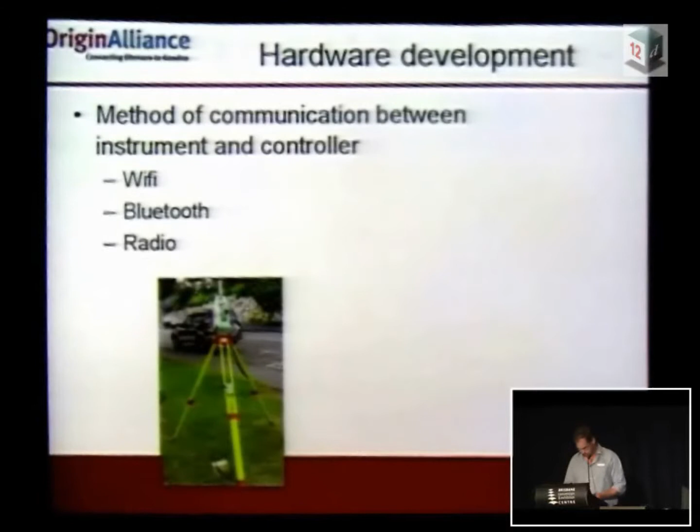So Paul was, Peter will just bring up a few photos there - Paul was very obliging and had developed a USB radio to talk to instruments, which has become one of the tools along with Wi-Fi and Bluetooth. But mainly on site these days we're using USB radios to talk to our instruments, and as you can see there, that was the first prototype from Paul: a grey radio, one end on a little tablet and another one on the legs.

So we headed in the right direction. We had some radios to talk, Mick's writing some software, it's coming along. We actually managed to prize a bit of a beta version out of Lee.

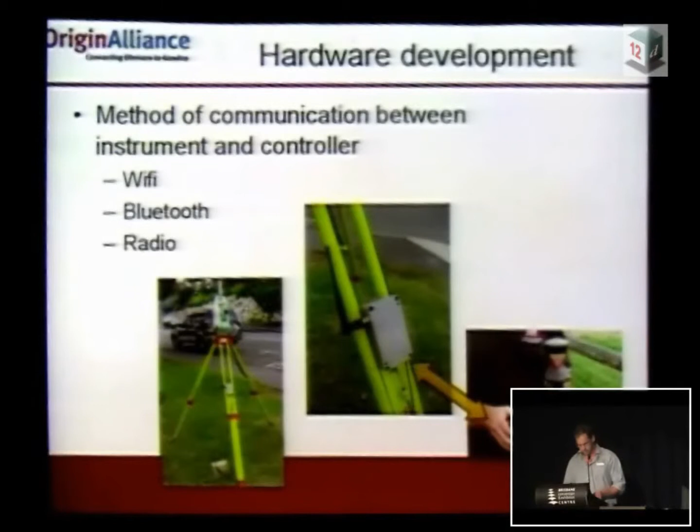The next problem was choice of PC platform on the other end. A few things had to be looked at there: battery life, touchscreen, keypad - a few questions about the possibilities. Pete searched the world over actually, tried lots of different stuff, all of which I had to find funding for, mind you. And these days we've settled on a fairly good platform, and I'm running 15 crews out there on that platform.

Next slide here that Pete's going to go to, and he had to zoom in. Some rigorous testing was completed by his 2-year-old daughter on these touch screens, just to make sure they were easy to use for surveyors. Apparently they passed. Thanks, Georgia.

So where we are now, we've got a very handy little USB radio developed by PDS. The first one you see there is silver, which was the first one that went to production, and in more recent times the yellow one, about the size of a cigarette packet, is the latest and greatest. It fits quite comfortably behind, hooks into any USB port on any computer, ruggedised tablet, anything you like. It only comes in yellow, but apparently, don't know why.

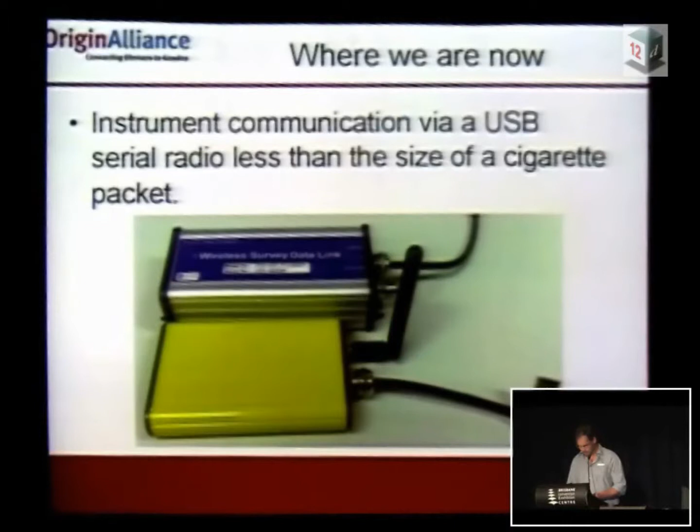Platforms - personally, we've settled on the Panasonic. It's just come out with a 300 nit transflective screen, and it's quite good. I'm sure it's going to be a big leap forward for the guys on site at the moment. We'll be using that one.

Further compatibility - compatibility to instruments, compatibility to GPS receivers. A few of those are on site, and Graham's spoken a fair bit about that.

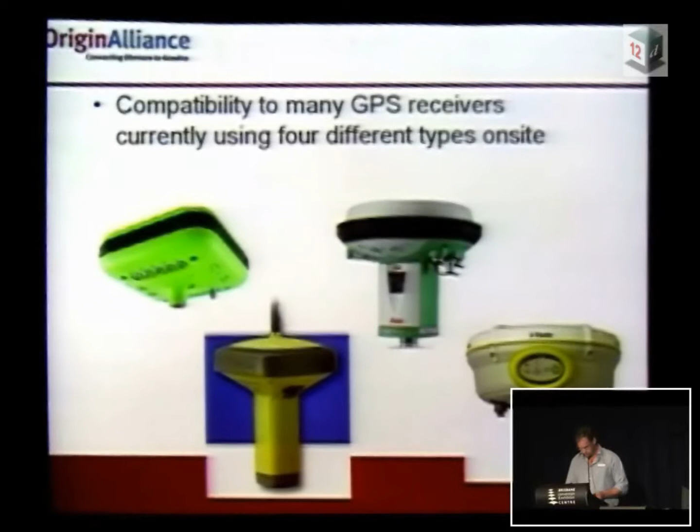More powerful, lighter hardware platforms - as you can see, in the last 2 years a lot of new stuff's come to market, and a lot more will come to market. One thing I think we will see for surveyors is a single desktop computer for site work, one computer that does everything. The platforms are getting powerful enough now that we'll be running everything off one platform, with really no need to run a second desktop computer.

And an even greater selection of survey instruments out there - that's going to grow and move on. So there we are, we've developed a very usable platform software for 12D field.

I can tell you it only just came in time for the Origin Alliance, and I really don't know where we'd be today without 12D field, because the revisions of models that get thrown at us - the TTM designs - we're up to revision 7 and 8, and I think last count was 13 or 14 TTMs, changing weekly, fortnightly. So developing files for third-party software would be a bit of a nightmare.

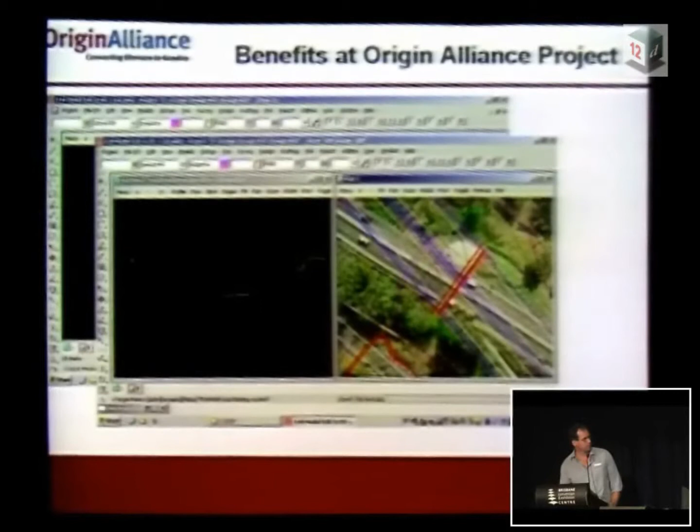I think we had a couple of screenshots of the type of thing - a fairly complex design there, 6 Mile Creek. These all run very smoothly on that little CF-U1 without a problem. You can actually run a raster in the background if we like, as we're out there. And we can even take a 3D bridge design out there as an example - one of the smaller bridges - and have a real good look at headstocks and abutments and different strings.

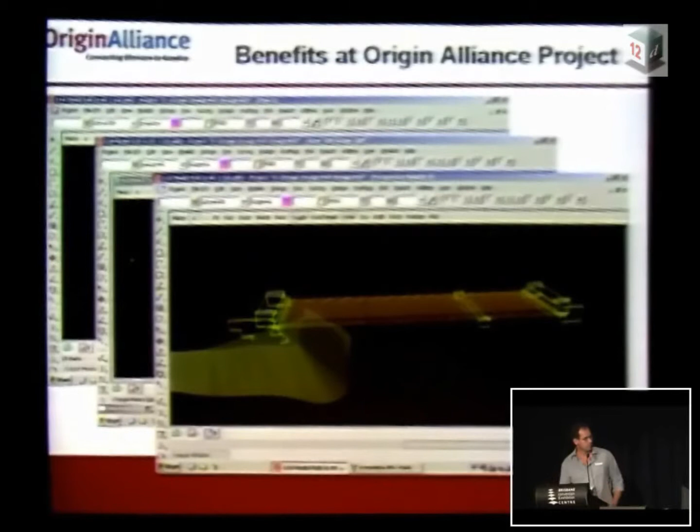So that was about the end of it for the 12D field site.

As I mentioned at the start, the big thing for surveyors on site these days with fast-tracked designs is getting information from the designers out to the guys in the paddock as quickly and smoothly as possible, with as little hardship as possible. From a 12D field point of view, 12D design given to us as a 12DA, uploading that is very simple. But there's something else we use today, which is machine control, so we also need to get files to our machines rapidly, out of 12D and into our machines as fast and smooth as possible.

One of the ways we do that is by being able to output directly out of 12D to our machines on site. For this we use a function in 12D which we'll go through shortly, to output our tins, our line work, and our alignment files directly out of 12D.

Once we've created those files, we upload them to the machine via a network and discuss the new design live on a screen with the operator.

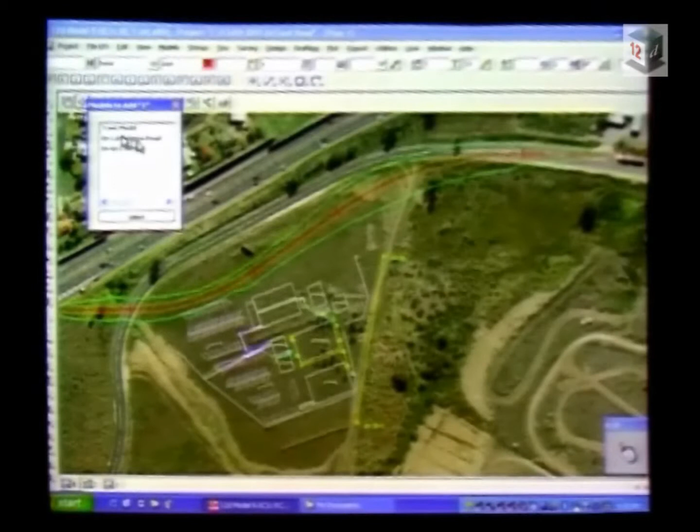So we've got a few strings there of a new road that we've created, Travis, and got rid of yours - it's too big, it's taking too long to build. In place of it, a very simple little road. We've tinned it, we've had a look at some contours, it's all good. Don't worry about it, Trav.

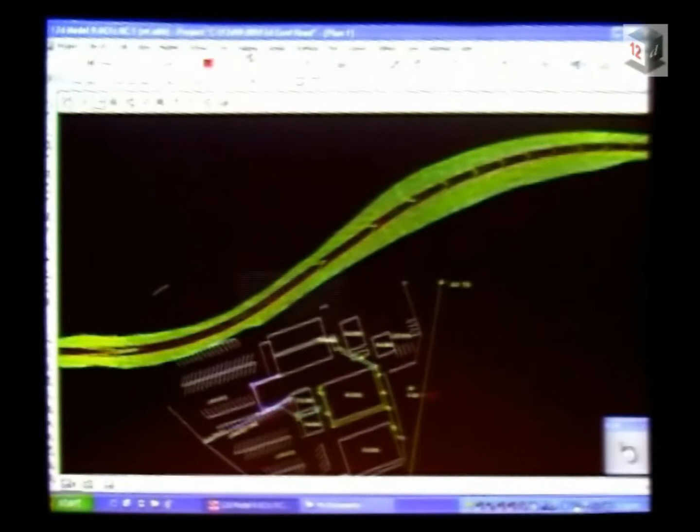That piece goes into survey, drops down to our Topcon machine control using on site. He's going to output three files here: an LN3 file for line work, a tin file, and also an RD3, which will be the center line.

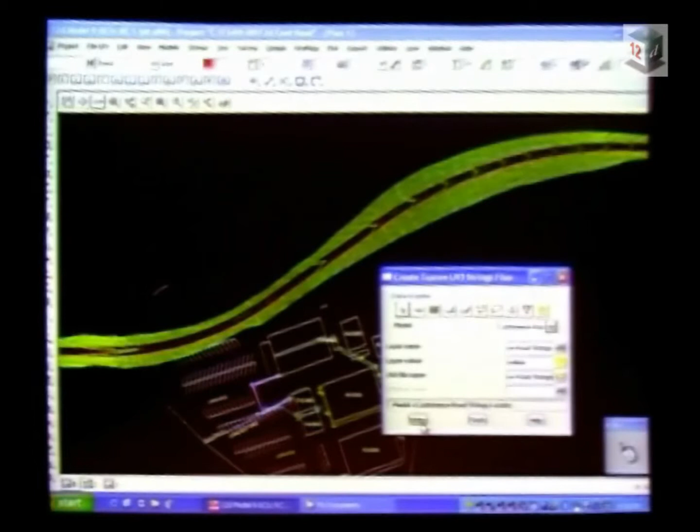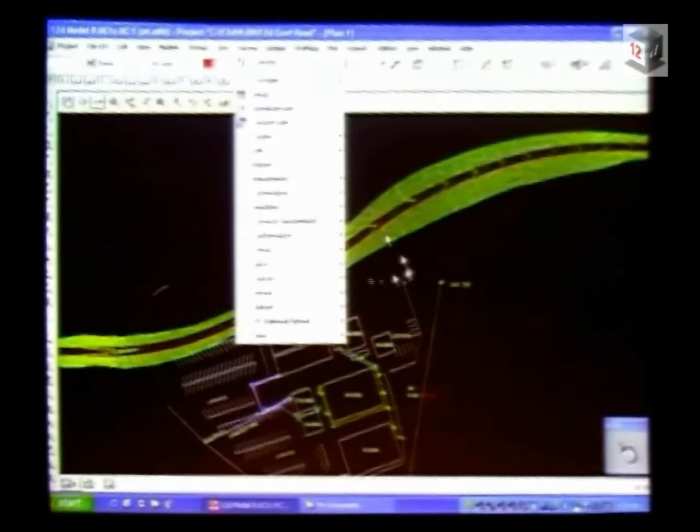The good thing about this is we're not having to take our 12D data and push it into another set of software to output files. For me, it's great because I don't have to purchase any other software other than 12D, and I don't have to train up guys on another set of software to produce these files. It's all coming out of 12D, and that's something else 12D Field negates for us - it's all coming out of one package, training is cut down, and the knowledge base needn't be as high as if we ran another set of software that would have to convert the data for instruments and GPS.

So where we at there, Pete? We've created those three files there - LN3, RD3, TN3 - from the new design.

In our survey office we have a dedicated computer purely for talking to our machines. It's normally run off an ADSL link, but today we're going to be brave and run off a NextG network link on the laptop, talking to another NextG network link on a grader on site.

As you can imagine, over an ADSL network it's probably going to be quicker, faster. Going from NextG to NextG is going to be a little bit laggy, but if all goes to plan, we'll still see some results.

So, last week's been very wet. Most of the operators, in fact all the operators, have knocked off. I'd normally have about 10 running around in graders and dozers and excavators.

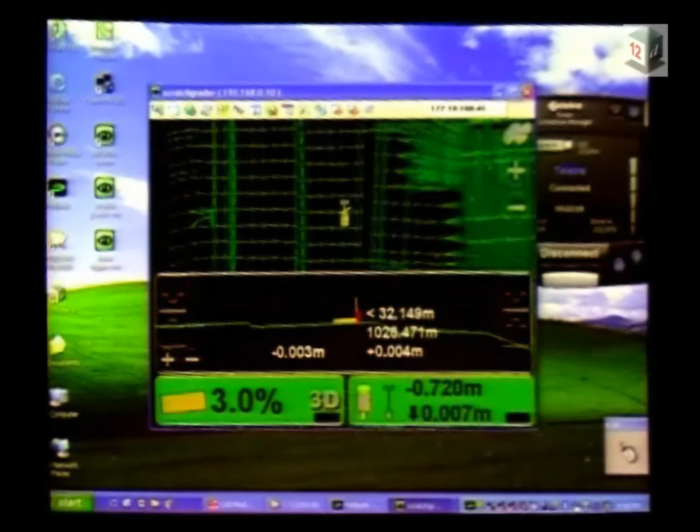What's the weather doing out there, mate? It looks like it's crazy. Yeah? The weather or your wife, mate?

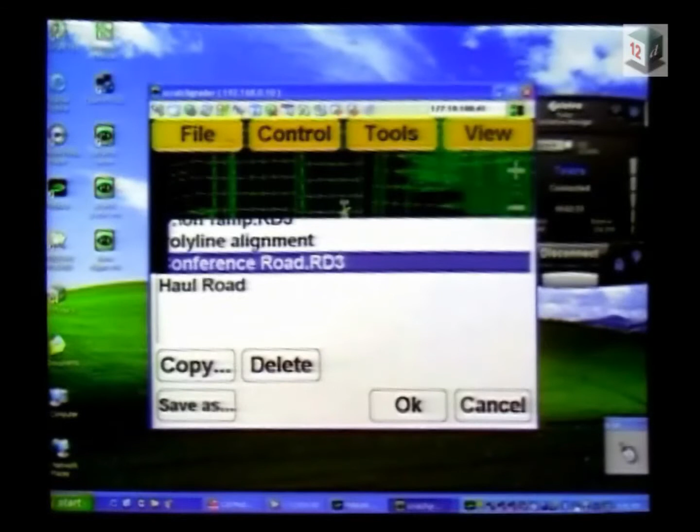Okay, so Peter's just done a remote computer to local computer file transfer. And as I said, we are going from NextG SIM card to NextG SIM card on a grader here, so it is a little bit laggy. I'm sure we can see what's going on. Peter will go and just choose your centre line for him.

Go and pick a new surface, new working surface. It's not going to be zone 2 finish level anymore, Travis. It's going to be our conference road.

So as it flicks over there, you'll see that load a new surface on. And there we go. There's our road that we just output out of 12D, into the grader. What does that look like, Scratch?

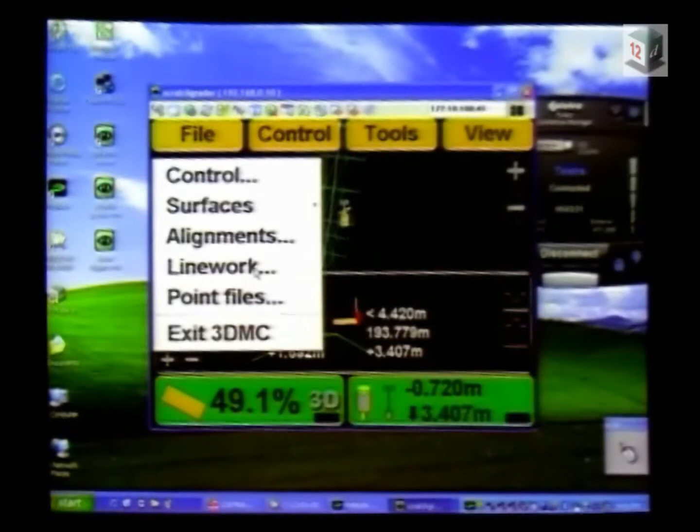Yeah, that's good, mate, yeah. Bit smaller, mate. We should be able to get the job done a bit quicker, eh? So, if you want to go for a bit of a drive, mate, move your blade around. These guys might be able to see what kind of cuts we're getting there.

Pete's also just loaded some, after the LN3 file, loaded some strings, so there we have it. If Scratch actually wants to go and do something.

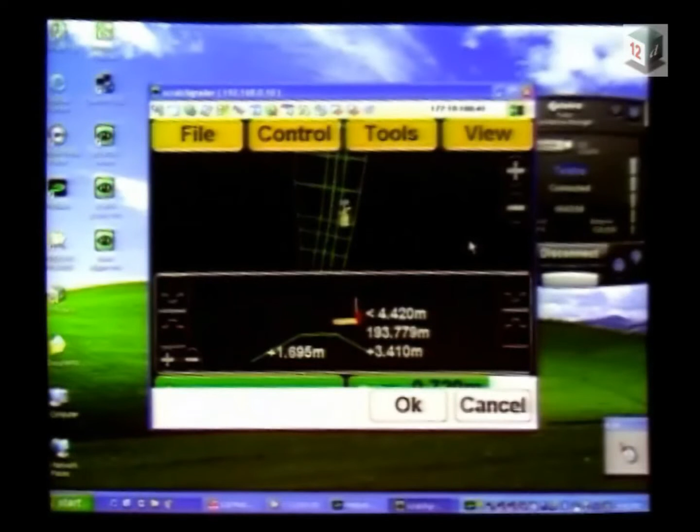As you imagine, the benefits of this - a few things out in the market are just screen grab stuff, file transfer. This is actually real life stuff, so as you can see, as Pete's pressing the buttons here, it's actually changing the computer in the cab. We're getting live feedback from the cab.

So as far as loading new designs, troubleshooting is a big one, a big bugbear of mine. Troubleshooting for machine control guys - you know, these guys, especially the newer guys to it, they'll be on the phone to us a fair bit. What string is this? What tin shell are we using in this area, etc, etc.

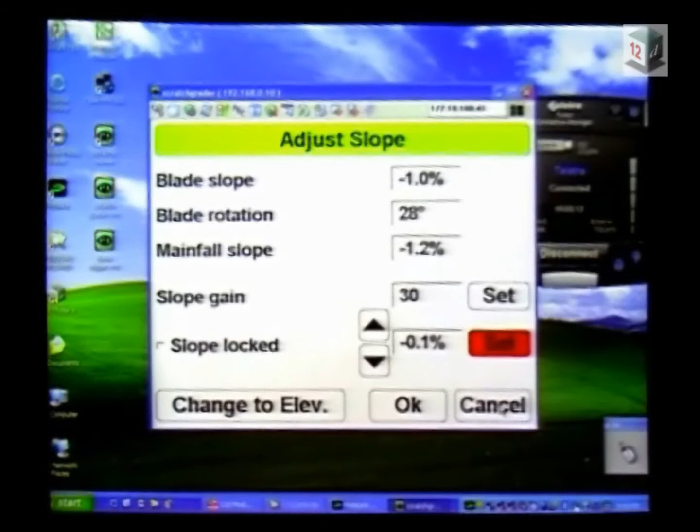So that enables us to log into their machine, check this all out live, and do some troubleshooting. If we've got to make a trip from the office out to a machine, we've got to go through entry gates these days, sign JHAs, get in the cab. It can be an hour or two before you get back to the office to do what you're doing, just to load a new design on. So it saves a lot. Once again, we could be in Perth or anywhere loading this to him and see what he's doing.

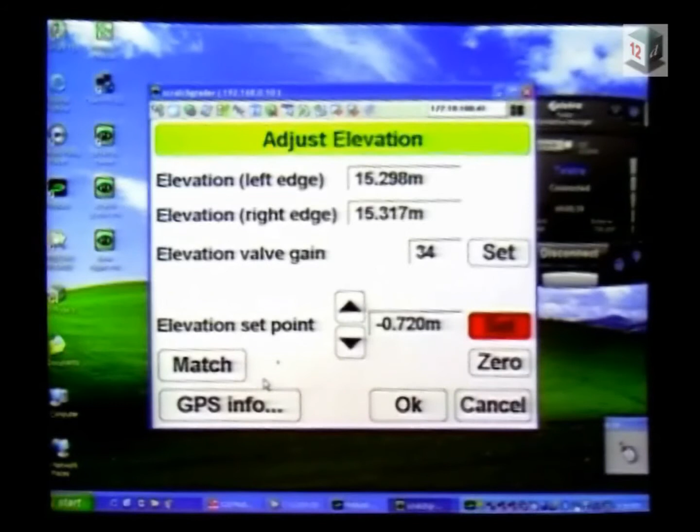Pete's just showing a few things inside the software there, as far as the satellites that the machine's tracking and a few other bits and pieces. We can obviously get in and have a look at all this stuff and troubleshoot problems on a day-to-day basis, which helps with a fair bit of satellite planning there.

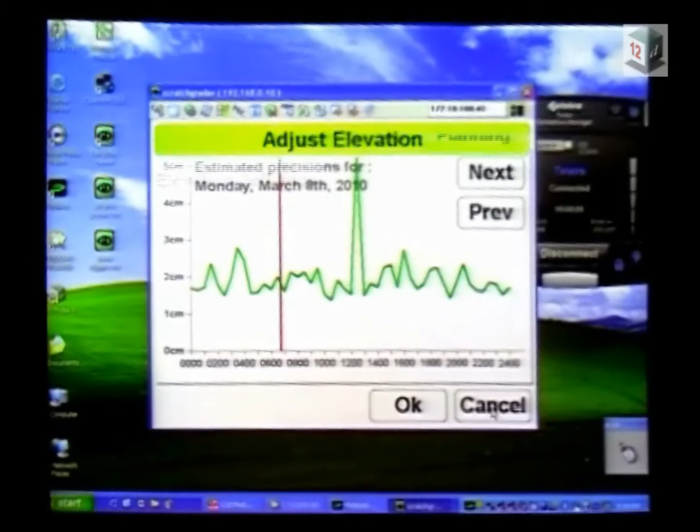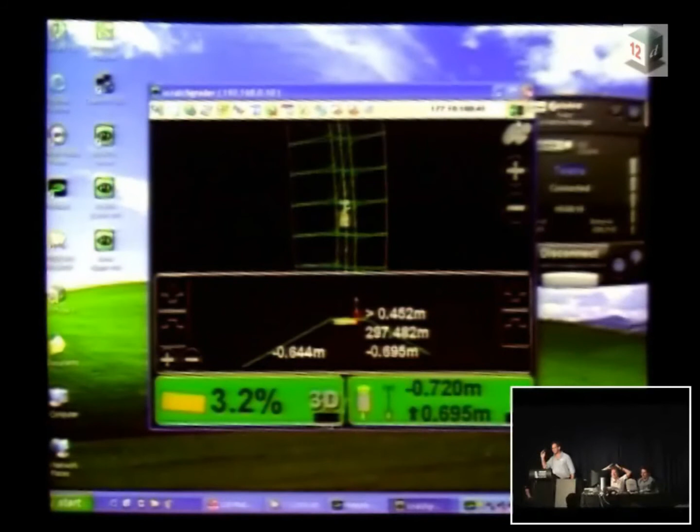How's it going there, Scratch? It's good? Righto, I'll let you go. Go and have a beer. Can we thank Scratch for hanging around and doing this for us.